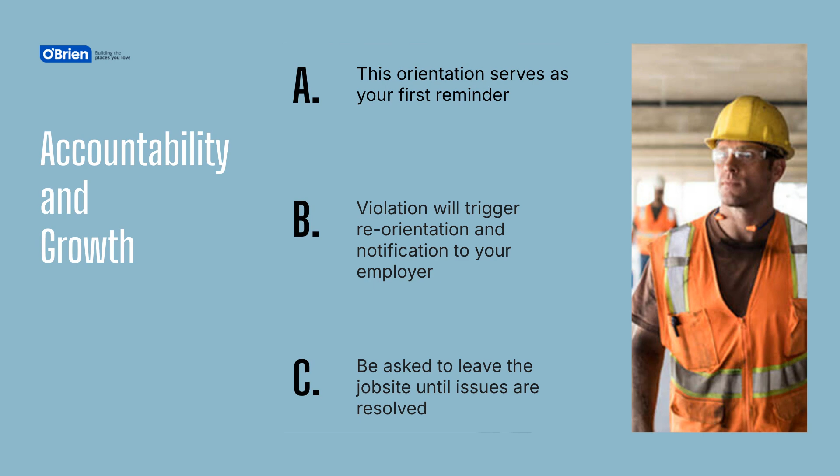Before you arrive on site, ensure you're fully prepared with all the required personal protective equipment to stay safe and compliant. This includes a hard hat, high visibility clothing such as a shirt, vest, or jacket, safety boots, protective eyewear, and gloves. Having the right gear is the first step toward a safe and productive day.

When you arrive on site, follow these essential steps before starting work. Sign in and out, making sure to include your phone number for accountability and communication. Complete the JHA, the job hazard analysis. Conduct a tailgate meeting with your crew. Ensure everyone on the team is listed on the JHA and submit it to the superintendent. Only after these steps are complete can you begin working. These procedures ensure everyone is aligned and ready to operate safely.

There's nothing more critical to ensuring your safety and the safety of your crew than starting each day with the job hazard analysis. This essential step sets the tone for a safe, productive, and organized workday.

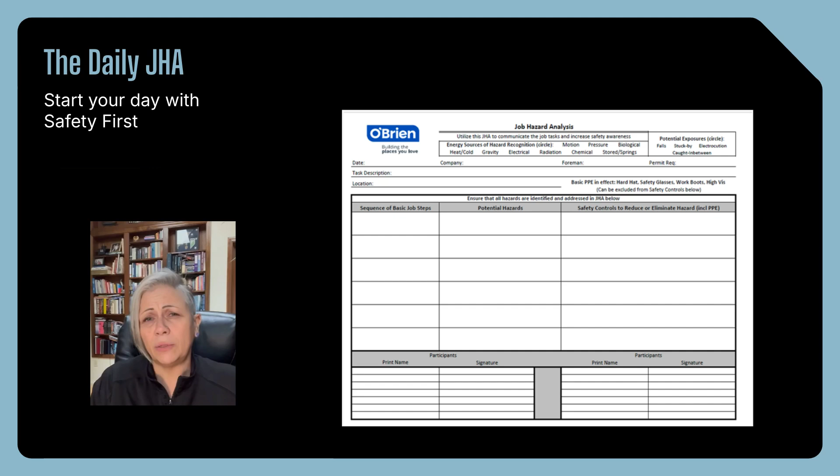Why the JHA matters: the JHA is more than a formality. It's a powerful tool with multiple purposes. Hazard identification and mitigation - pinpoint potential risks and implement solutions before work begins. Communication - create clear and open dialogue within your crew to ensure everyone is on the same page. Organization - lay out a structured plan for the day, reducing confusion and improving efficiency. Education.

Empower everyone with the knowledge they need to recognize and address hazards confidently. By completing the JHA, you're making a proactive commitment to safety and teamwork. Together, we can achieve a zero-incident worksite.

A JHA focuses on identifying hazards in job tasks before they occur. It evaluates the relationship between the worker, the task, the tools, and the environment. Once hazards are identified, steps are outlined to eliminate or control them, ensuring a safer workspace.

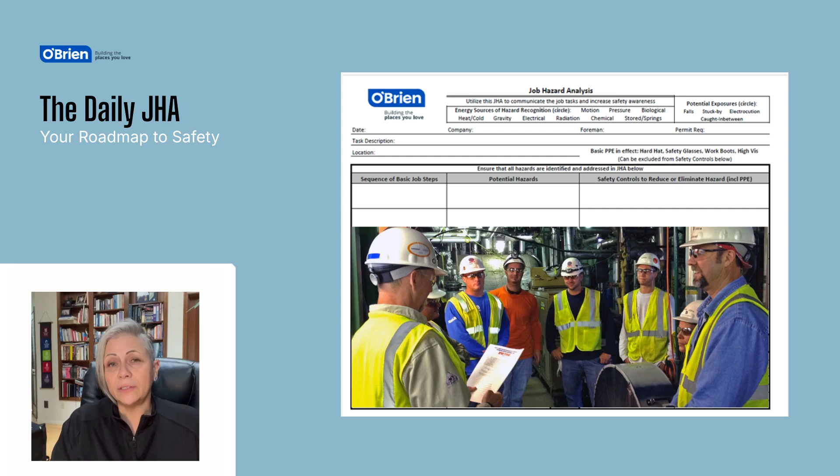Involve the whole team. Collaboration is key to a successful JHA. Each crew member brings unique insights, helping to identify hazards that might otherwise be overlooked. Involving everyone promotes a thorough analysis and fosters shared ownership of safety solutions, encouraging team commitment to a safer workplace.

When completing the JHA, conduct a preliminary job review. Discuss with your crew the hazards they know exist in their current work and surroundings. Brainstorm with them for ideas to eliminate or control those hazards.

Outline the steps or tasks for the day and fill out the sequence of job steps along the left side of the JHA. Be sure to record enough information to describe each job action without getting overly detailed.

Review these job steps with everyone to make sure you have not missed a step. The list of job steps is also a communication tool that allows the superintendent to be aware of what you're working on for the day.

Identifying the potential or existing hazards associated with each job step is the next step in the JHA process. For each job step, utilize everyone on the crew to identify all of the associated hazards and enter them in the potential hazards column. If you have identified more potential or existing hazards than can fit in the field, you can continue in the box below.

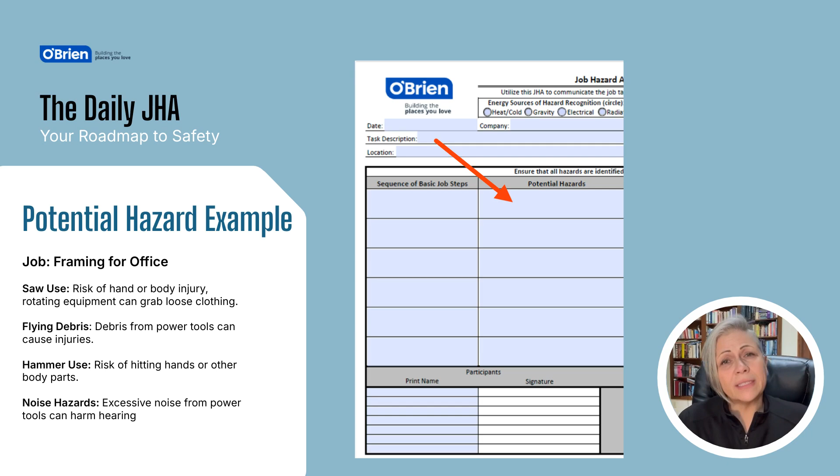The next step is to identify the practices to use to avoid or control the identified hazards and list them in the safety controls to reduce or eliminate hazard, including PPE. For example, continuing the framing job step would look like this.

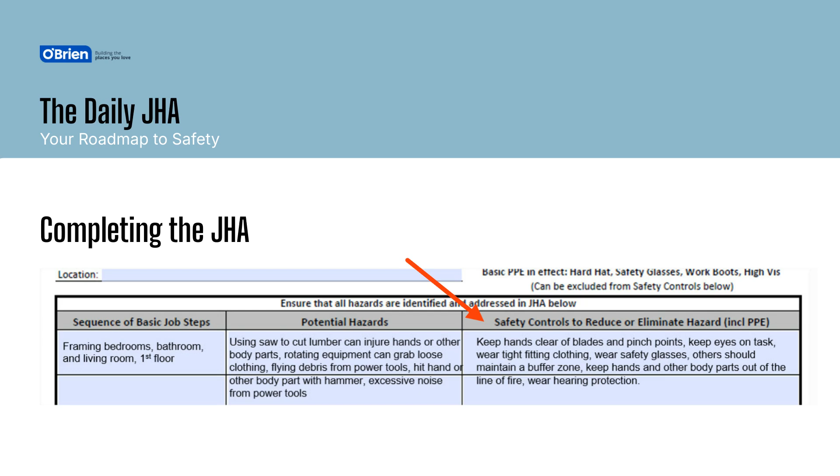When you've identified a hazard, the next step is figuring out how to control or eliminate it. One helpful approach is the hierarchy of controls, which provides steps to minimize risk. If you can't completely remove the hazard, here's how you can address it in order of effectiveness.

Substitution: swap out the hazard for a safer alternative. Engineering controls: add physical barriers like guards or interlocks to separate you from the hazard. Administrative controls: adjust how the work is done to reduce exposure to the hazard.

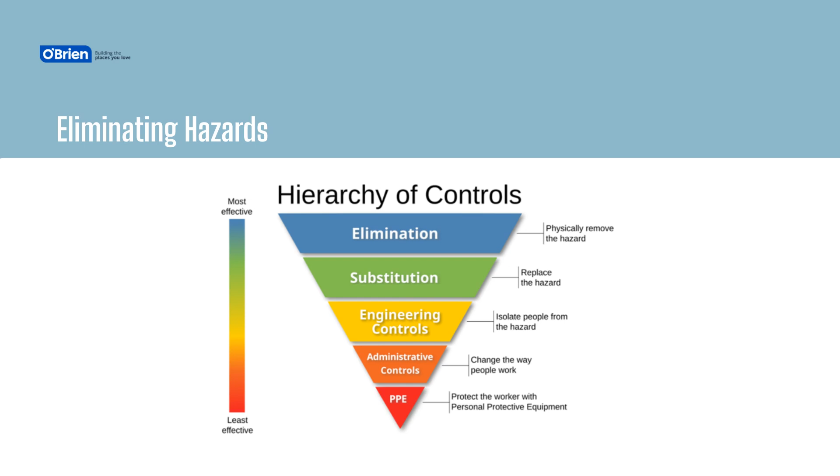PPE, or personal protective equipment: use gear like gloves, goggles, or hard hats as your final layer of protection. The goal is always to use the most effective solution possible, starting at the top of the hierarchy.

Continue the list of job tasks for the day along the left column, then identify the potential and existing hazards for each task in the center column. Then the controls for eliminating or controlling the associated hazards in the right column. Then have everyone on the crew read and sign the JHA.

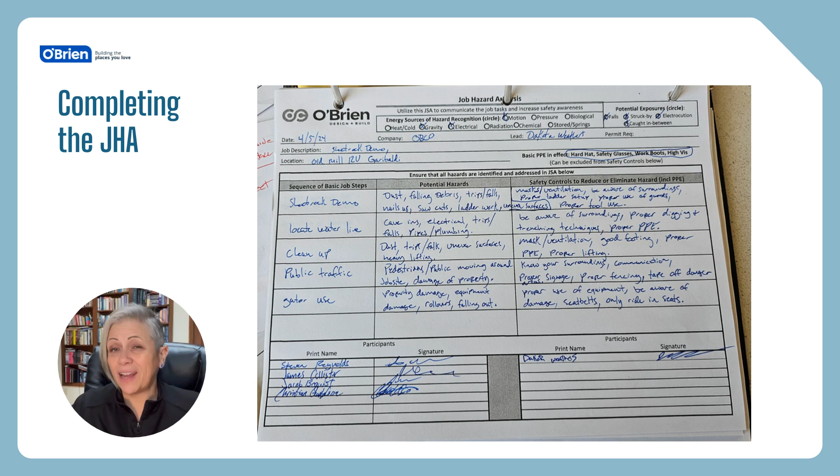Please note that basic PPE is already in effect and should be worn while working on site, such as hard hats, high visibility clothing, safety boots, and safety glasses.

Let's talk about personal protective equipment, or PPE, and the responsibilities we all share to ensure it's used properly. First, it's the employer's responsibility to provide all required PPE to their employees. That means you should always have access to the gear you need to stay safe.

Now, let's cover the minimum PPE requirements while working on site. At all times, you must wear a hard hat, safety glasses, protective footwear, and high visibility clothing. One quick note on footwear: tennis shoes are not allowed on O'Brien projects except for roofing tasks.

If you need to wear soft-soled shoes for roofing, make sure to note it on your JHA before beginning work. In addition to the basics, you may need extra PPE like hearing protection, a face shield, or gloves, depending on the task. Make sure you're aware of what's required for your specific job.

If you arrive on site without the proper PPE, you will either be sent off-site until you have the required equipment, or, if available, O'Brien will provide PPE and the sub will be charged for it.

It's not enough to just have the equipment. It needs to be in good shape. All PPE must be clean, safe, and reliable. Inspect your equipment before wearing it to ensure it's in good condition.

One more important note: if you're wearing a hard hat, remember to connect the chin strap when you leave the ground. That includes tasks like working on ladders, lifts, or roofs. By following these guidelines, we're ensuring a safer work environment for everyone. If you have any questions about your PPE or what's required for a task, don't hesitate to ask your supervisor.

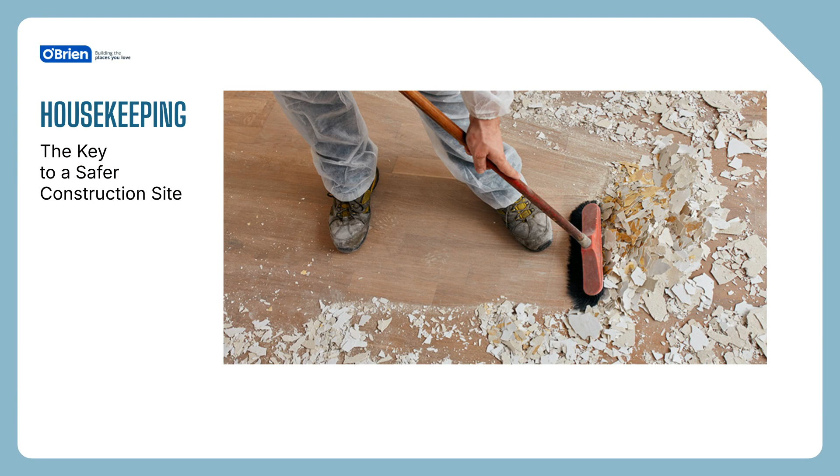Keeping your work area clean is a simple but essential part of maintaining a safe and efficient job site. By cleaning as you go, rather than waiting until the end of the day or even the week, you help create a safer environment for everyone.

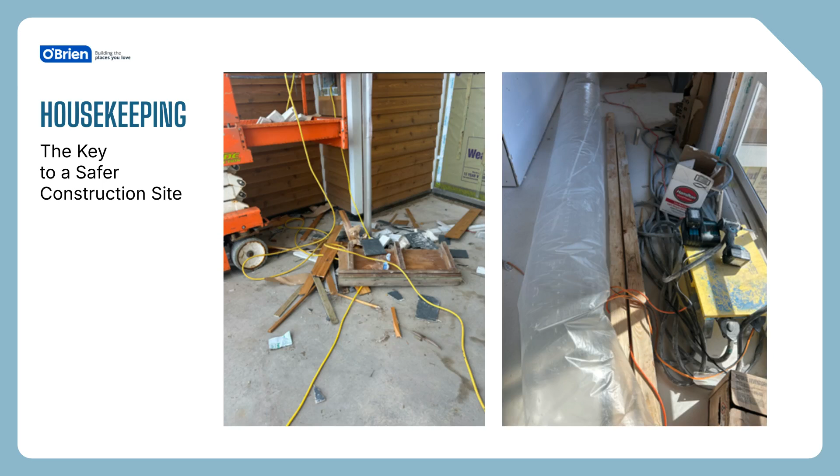Take a look at the images here. They highlight examples of poor housekeeping, which can result in hazards like slips, trips, and falls. Beyond safety risks, poor housekeeping can also lower team morale, reduce efficiency, and even lead to fire hazards or damage to equipment and materials.

If you leave an area in an unsafe or unclean condition, O'Brien will take steps to clean it, and the cost of that cleanup will be charged to your company. In addition, your company's owner will be notified.

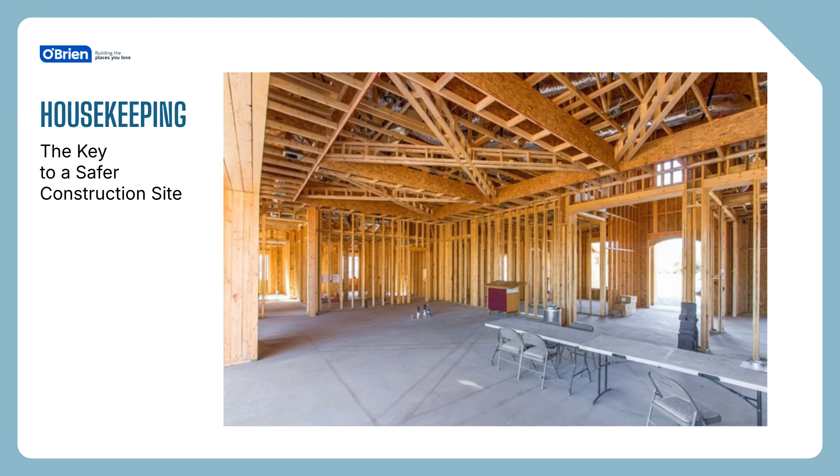We can avoid all of this by staying proactive. Good housekeeping is everyone's responsibility, and it helps us work smarter, stay safe, and maintain a job site we can all be proud of. Remember, a clean site is a safe site.

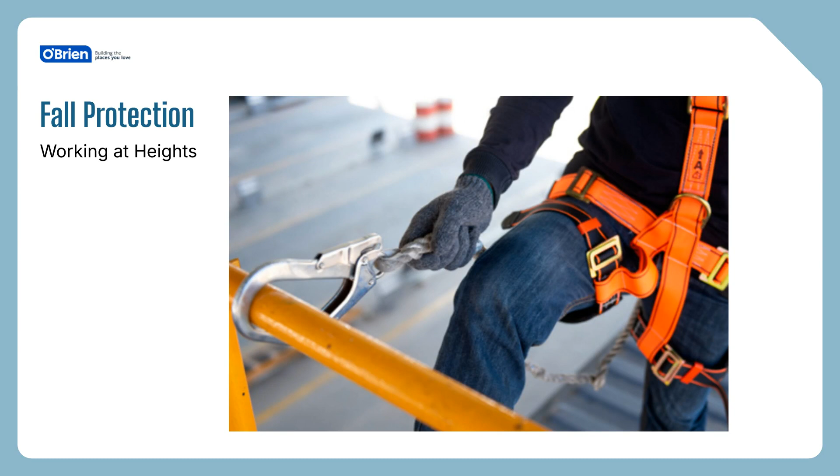When working at heights, 100% fall protection with a rescue plan is required at all times. Here's what you need to know.

In Oregon, fall protection is required for heights of 6 feet or greater. In Washington, the requirement starts at 4 feet or greater. Each employer must provide a competent person on site at all times to oversee fall protection measures.

If any fall protection equipment is deemed unsafe, it will be removed or destroyed at the discretion of the superintendent or director of safety. Every employee wearing personal fall protection must be properly trained.

This includes understanding the purpose of fall protection equipment, inspecting it before use, knowing how to wear it correctly, and storing it properly. You may be asked to provide proof of your fall protection training at any time. Failure to do so will result in removal from the site until proof is provided.

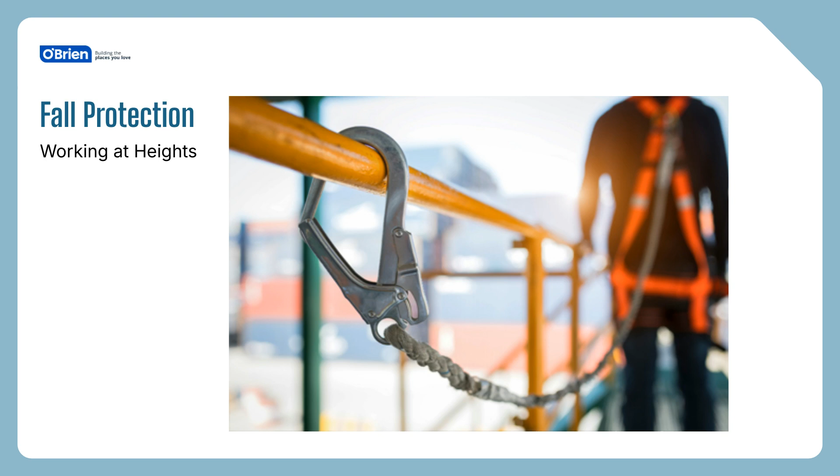Violating the fall protection policy is taken very seriously. A first-time violation can result in immediate and possibly permanent dismissal from O'Brien projects.

Why such strict enforcement? Falls from heights are the number one cause of fatalities in the construction industry. Protecting you and your coworkers is our top priority, and this policy is designed to ensure everyone goes home safe at the end of the day.

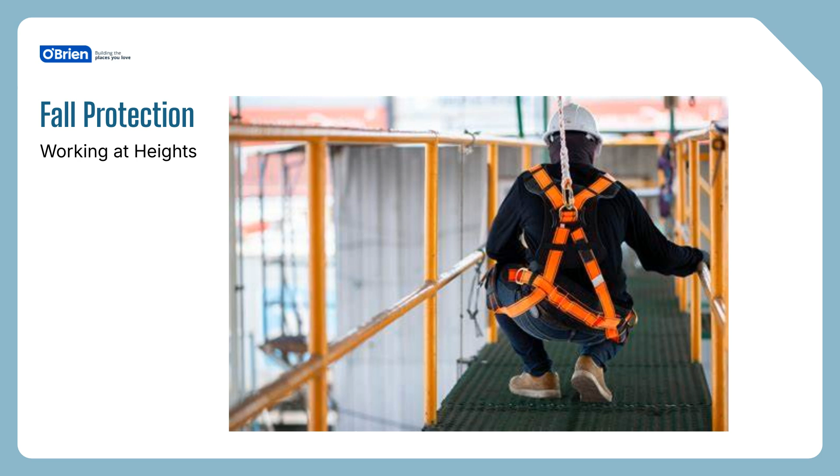Whenever possible when working at heights, we prefer passive fall protection, such as guardrails. Guardrails must be 42 inches high, plus or minus 3 inches. They must include a mid-rail and toe board for full protection.

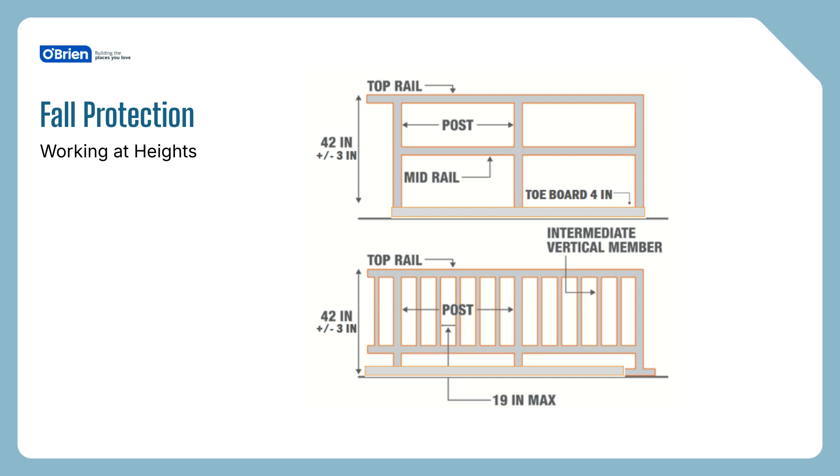Fall protection is mandatory in the form of guardrails or a personal fall arrest system with the use of an anchor, body harness, and a lanyard. Controlled access zones with warning lines are not allowed on O'Brien projects. These measures are essential for ensuring everyone's safety while working at heights.

Let's talk about ladder safety, one of the most important aspects of working safely on a construction site. Following these simple guidelines can prevent accidents and keep everyone safe.

Always face the ladder. Whenever you're climbing or descending, always face the ladder and maintain 3 points of contact. This means 2 hands and 1 foot, or 2 feet and 1 hand, should always be in contact with the ladder. Use the belt buckle rule.

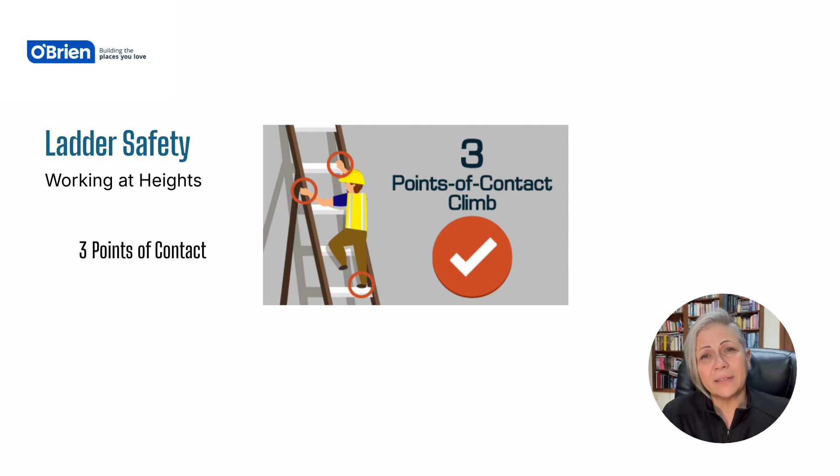Remember the belt buckle rule, do not overreach. Keep your belt buckle within the sides of the ladder to maintain balance and avoid tipping it over.

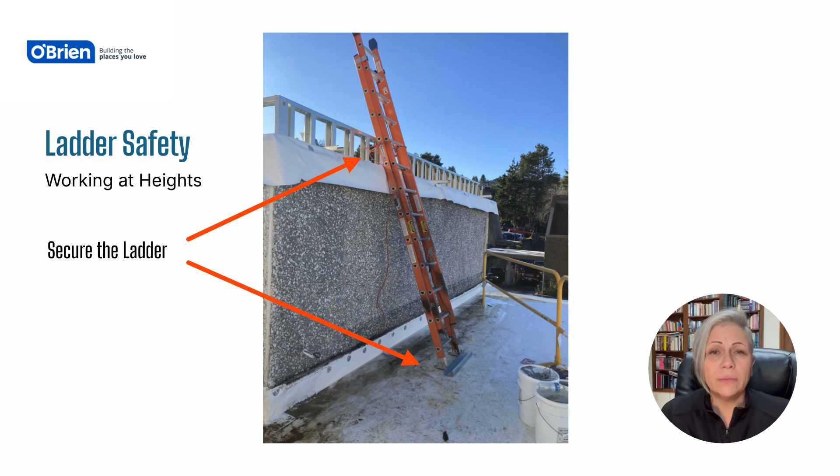Secure the ladder. Ladders must be secured at both the top and the bottom to prevent movement while in use. When using an extension ladder, ensure that it extends at least 3 feet above the landing it provides access to. This gives you a secure area to step off and on safely.

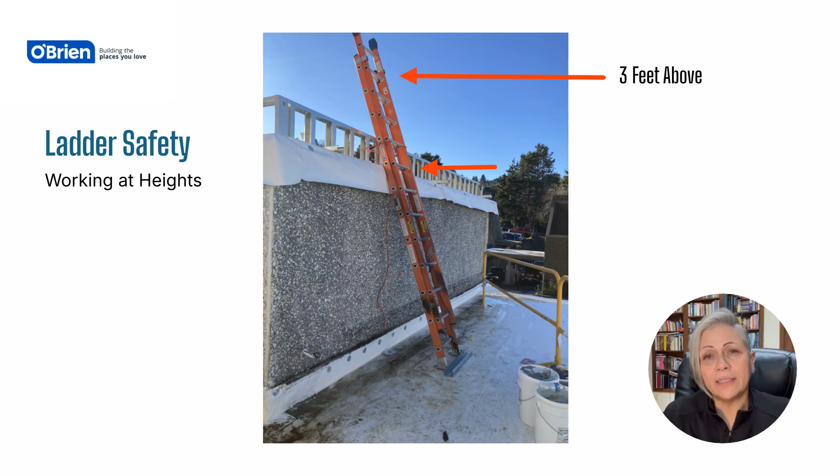Make sure to have the correct ladder angle, the 4-to-1 method. To set the ladder at the correct angle, use the 4-to-1 method. For every 4 feet of height, place the base of the ladder 1 foot away from the wall or structure.

To test the angle, place your toes at the bottom of the ladder. With your hands outstretched, you should be able to reach a rung comfortably without bending your arms or leaning forward.

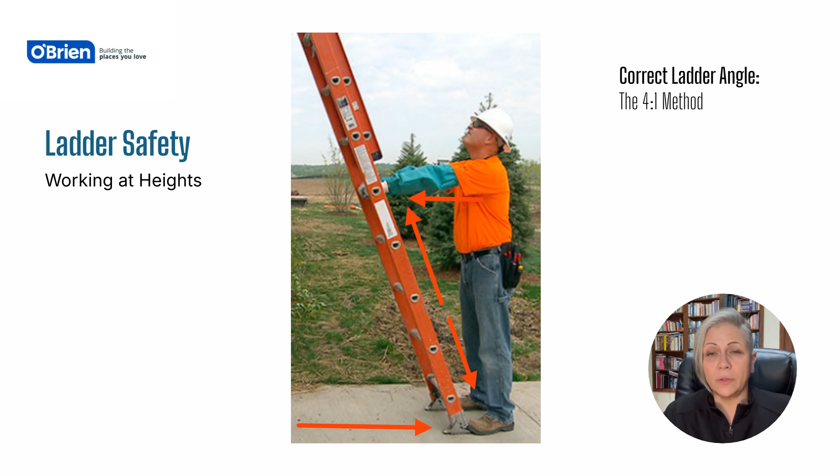Inspect the ladder before use. Before using a ladder, inspect it for cracks, damaged rungs or rails, missing screws or rivets. If you find any damage, do not use the ladder. Check labels to ensure that all labels are present and legible.

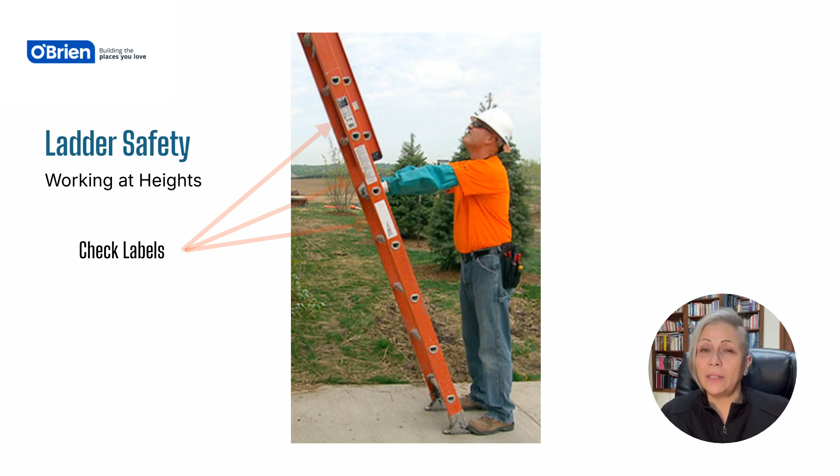These labels often include important safety information and warnings. Now, let's discuss the proper use and safety guidelines for stepladders. Adhering to these rules is essential for preventing injuries and ensuring a safe work environment.

A stepladder must never be used to access another level or surface. Always remember, a stepladder is considered a working platform, not a tool for climbing between heights. The top step and cap of a stepladder should never be used as a step. Using these areas compromises your balance and safety.

Ensure the spreader bars are fully extended and locked into place before using the stepladder. This provides stability and prevents the ladder from collapsing.

Before using the stepladder, inspect it carefully for any signs of damage. Look for cracks, damaged rungs, or rails. Check for missing screws or rivets. Do not use a ladder that is damaged in any way.

All 4 feet of the stepladder must be firmly on the ground. Avoid placing the ladder on uneven or slippery surfaces.

Always face the ladder while climbing and maintain 3 points of contact. This means having 2 hands and 1 foot, or 2 feet and 1 hand, on the ladder at all times.

Follow the belt buckle rule. Keep your belt buckle centered between the ladder rails. Do not overreach or lean too far to either side.

Ensure all labels on the ladder are present and legible. They provide important safety information and instructions.

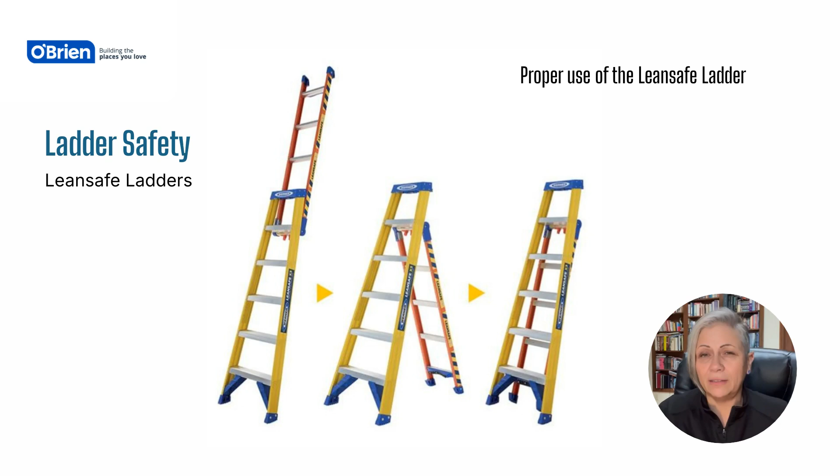To ensure your safety, follow these best practices when using a Leansafe ladder. Stay off the top step and cap; they are not designed for standing. Keep all 4 feet on the ground when using it as a stepladder. Inspect before use. Look for any damage or wear before climbing.

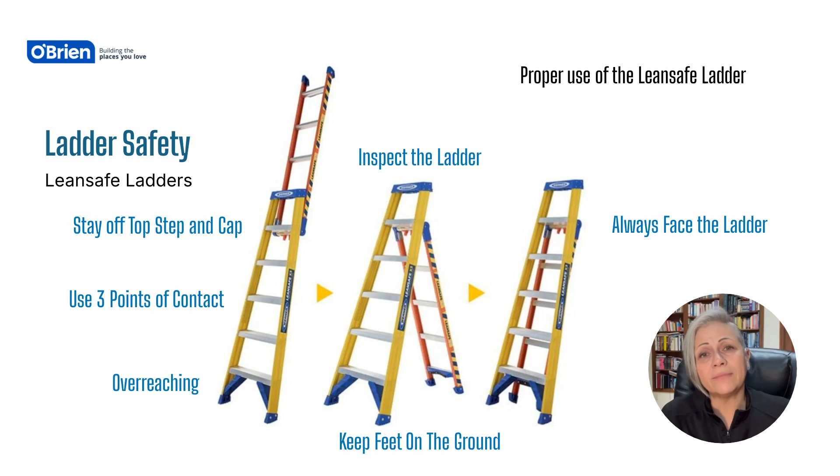Always face the ladder while working to maintain stability. Use 3 points of contact at all times for balance and security. Follow the belt buckle rule. Never overreach beyond the ladder's side rails. By following these simple but essential steps, we can keep our work sites safer and prevent falls.

Power tools are essential for getting the job done, but using them safely is just as important as using them efficiently. By following a few key safety rules, we can protect ourselves, our coworkers, and our job site from preventable accidents. All power tools must have proper working guards.

They are there to protect you. Saw guards must remain in place and should never be pinned back. The ground plug must never be cut off and should only be repaired using original manufacturer's replacement parts.

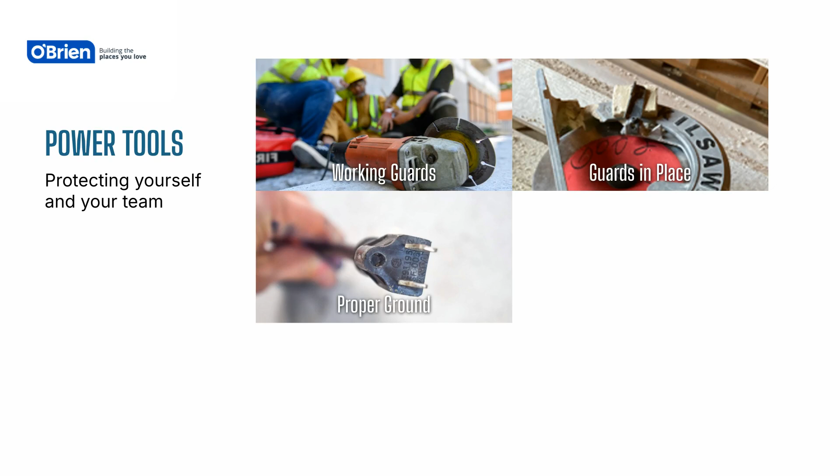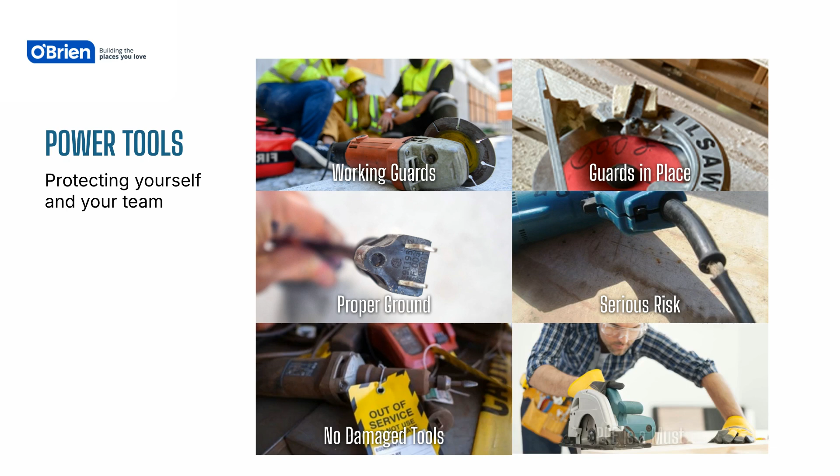If a power cord is damaged, it can create serious risks. The entire pigtail must be replaced by a certified electrician. If a tool is damaged, defective, or unsafe, it must be removed from the site immediately, no exceptions. When operating power tools, gloves and safety glasses must be worn at all times.

By taking these simple precautions, we can keep our tools in top shape and our work site safe.

Electricity is a powerful tool on our job sites, but improper use of cords can create serious hazards. By following a few simple guidelines, we can ensure a safe and efficient work environment for everyone.

Best practice is to always inspect and maintain your cords and read the labels. Extension cords cannot be connected together or daisy-chained. Always use a cord of the correct length to avoid overload and fire hazards.

Damaged or modified cords are a risk to everyone; they must not be used on the site. All power for construction must be protected by a GFCI branch circuit. This prevents electrical shocks and ensures compliance with safety standards.

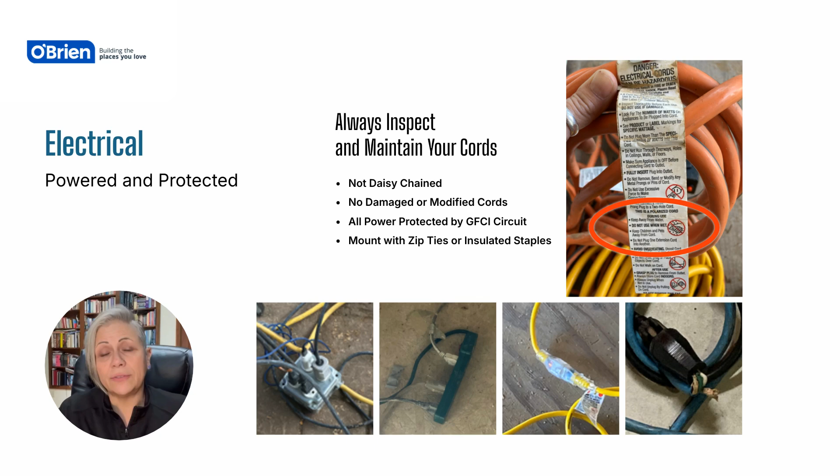Cords should never be mounted with nails or staples, as they can pierce the insulation and create a fire or shock hazard. Instead, use zip ties, insulated staples, or other non-metallic fasteners.

If an extension cord is deemed unsafe, it will either be removed from the site or destroyed at the discretion of the superintendent or director of safety. By following these best practices, we can prevent accidents, protect our equipment, and keep our job site running smoothly.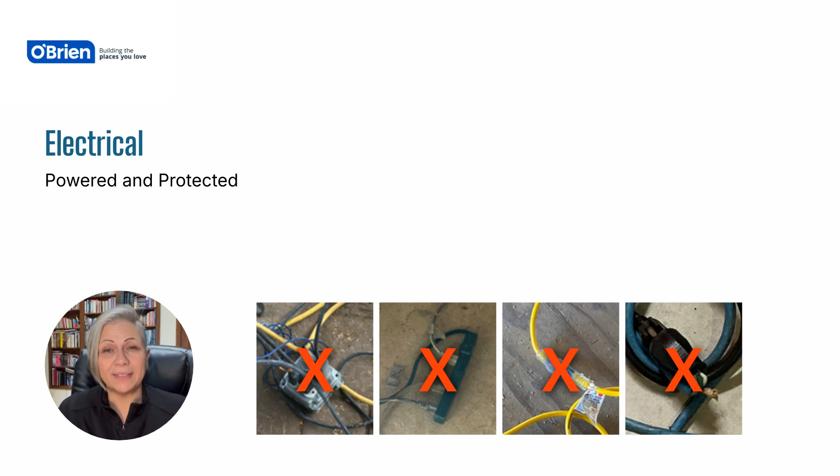Scaffolding is an essential tool for working at heights, but it must be properly inspected, maintained, and used correctly to keep everyone safe. Let's review some key scaffolding safety guidelines to ensure a safe and productive job site.

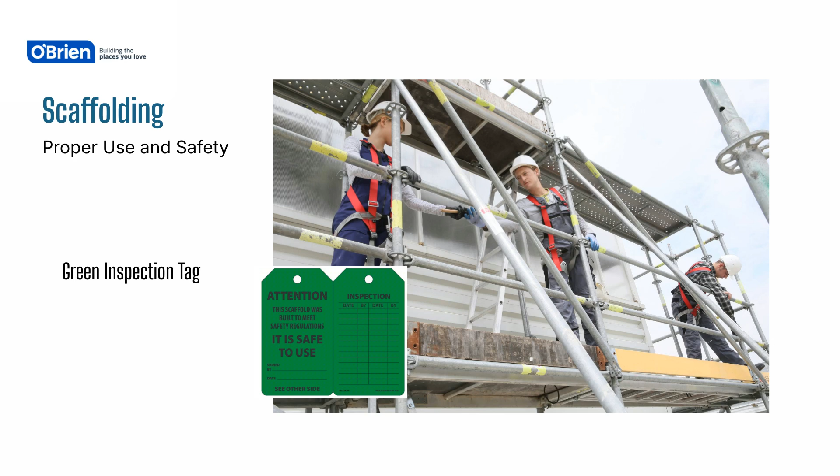A competent person from the subcontractor must inspect and certify all erected or mobile scaffolding at the start of each shift. A green inspection tag must be attached to the scaffolding. It should be placed within eyesight of the ladder leading to the next level and must be filled out daily. Training is required. Every worker using scaffolding must be trained in scaffolding safety.

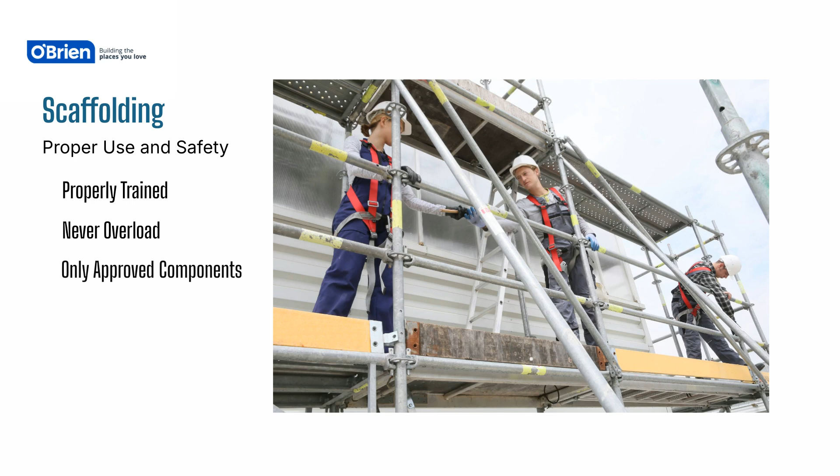Never overload scaffolding planking. Exceeding weight limits can compromise structural integrity and cause collapse. Use only approved scaffolding components. Makeshift or non-standard parts can lead to instability. Follow the manufacturer's instructions. Proper setup and use ensure scaffolding remains safe.

Inspect before use. Check to see if any scaffolding components are damaged. Proper planking must be in good condition and pushed together to eliminate any gaps. Any concerns or modifications should be immediately reported to the O'Brien superintendent for review.

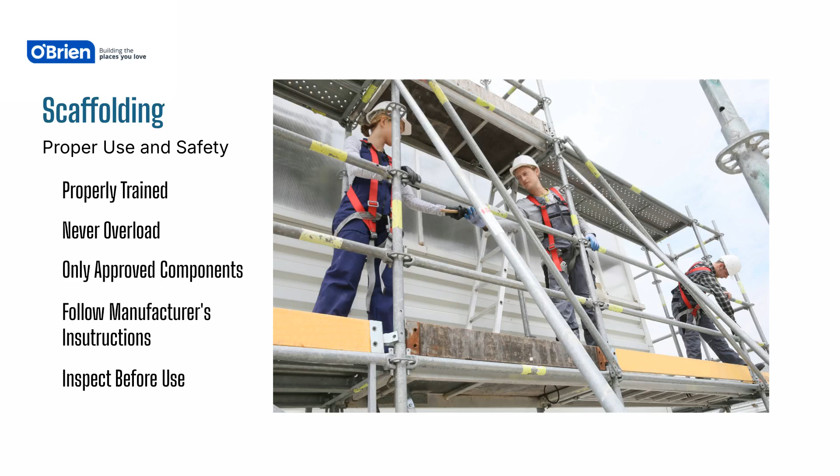Never use unstable objects like bricks or boxes to support scaffolding. And never walk under scaffolding. Base plates must be centered on a mudsill and secured on two opposing sides for a firm foundation.

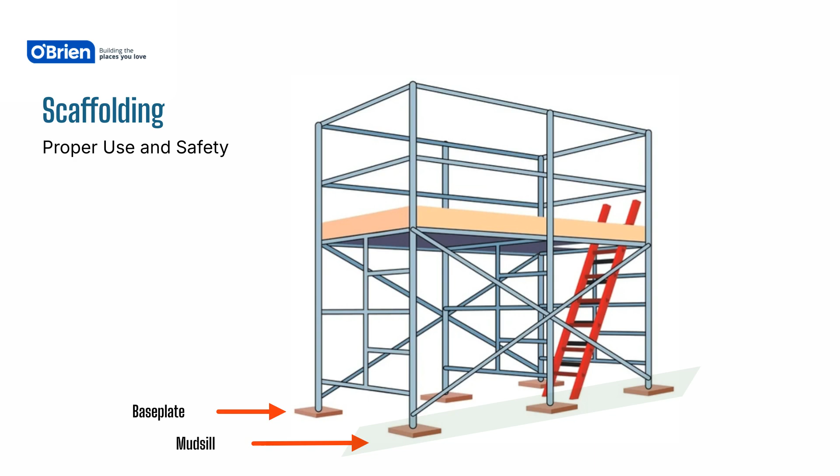Use guardrails, handrails, toe boards, or debris nets to protect against falling objects. If a guardrail is not present, you must wear a personal fall arrest system. Use catch platforms or canopy structures to deflect falling objects and keep workers below safe. Install netting to catch anything that falls, preventing hazards to workers and bystanders.

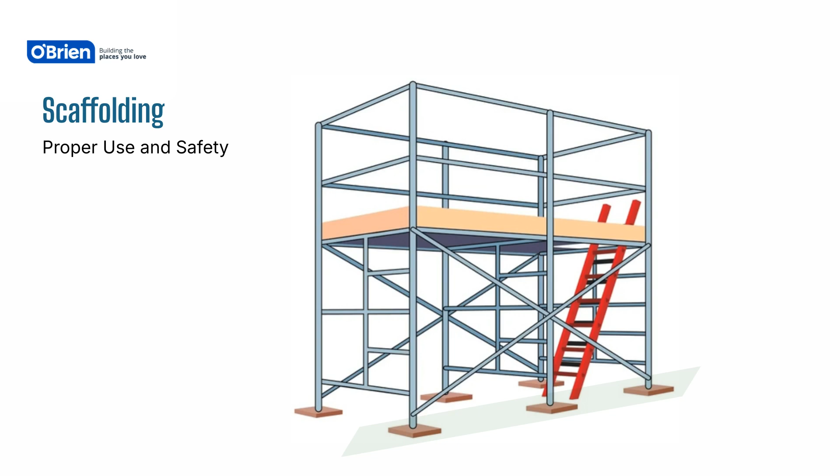By following these scaffolding safety guidelines, we reduce risks, prevent falls, and ensure a secure work environment for everyone.

Now let's review the essential basic safety rules that apply to every job site. These guidelines are in place to protect you, your coworkers, and the integrity of our projects.

Weapons and violence. Safety starts with respect. Weapons and any form of violence are strictly prohibited on our job sites. If you see any threatening behavior, report it immediately. We foster a culture of teamwork and professionalism, and there is no room for hostility.

Music and earbuds. We all enjoy music, but on a job site, communication is key. Earbuds are not allowed. Music should never interfere with communication, and superintendents reserve the right to ban music completely if it becomes a distraction. If you need to hear instructions, warnings, or signals, you must be fully aware of your surroundings at all times.

Dress code. Your safety starts with what you wear. The following attire is not allowed: sweatpants, tank tops, shorts, torn or tattered clothing. Wearing proper work attire helps protect you from hazards, debris, and potential injuries. Ensure you dress appropriately for the job and wear all required PPE, personal protective equipment.

Fuel storage. If you work with fuel cans, they must be made of metal, properly labeled, equipped with a spark flame arrestor. Improper storage or handling of fuel can create dangerous conditions, including fires or explosions. Always follow the correct procedures.

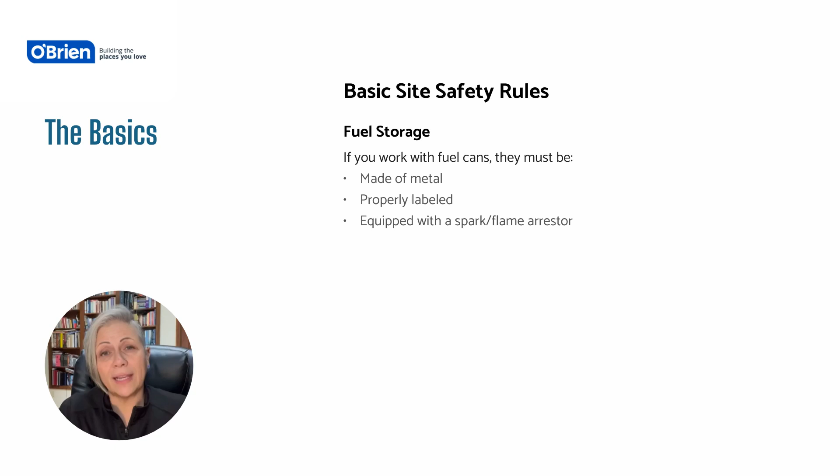Storing hazardous materials. Any hazardous material must be stored properly and accompanied by a safety data sheet, SDS. The SDS provides critical information on handling exposure risks and emergency procedures. If you're ever unsure about a material, ask a supervisor or consult the SDS before use.

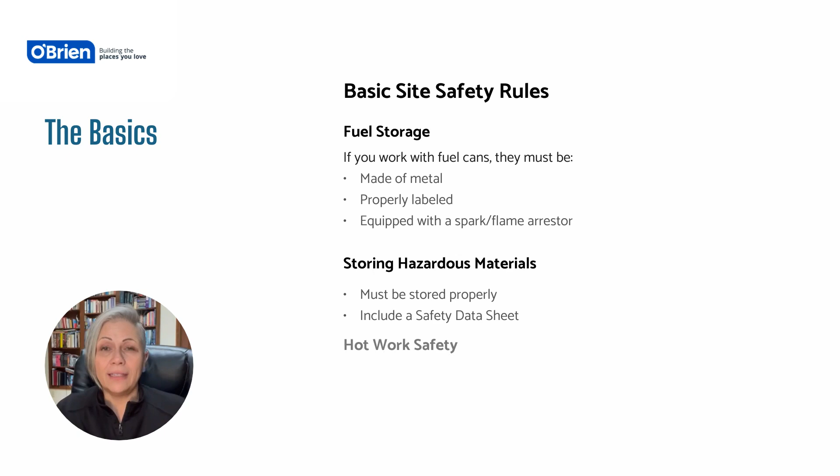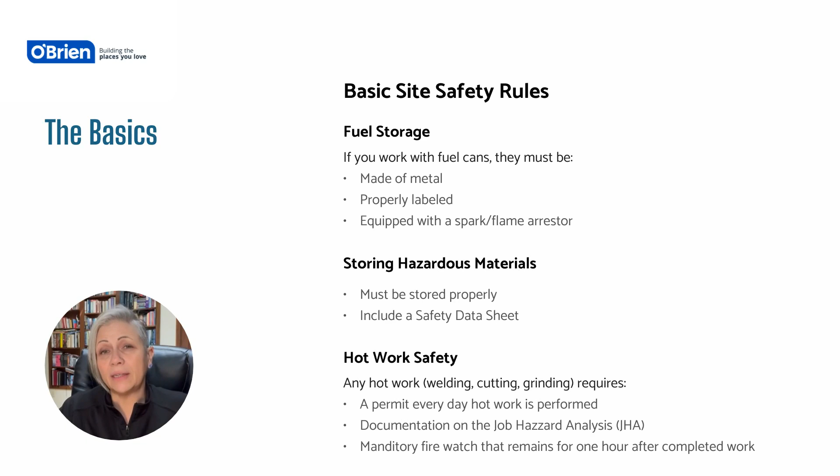Hot work safety. Any hot work, such as welding, cutting, or grinding, requires a permit every day hot work is performed, and documentation on the job hazard analysis. A mandatory fire watch must remain for at least 1 hour after work is completed. Fire hazards can arise long after the work is done, which is why the fire watch is so important. Never leave an area unattended if hot work has just been performed.

Fire safety and fire extinguishers. Fire safety is everyone's responsibility. Fire extinguishers must be within 50 feet of all flammable materials. The maximum travel distance to a fire extinguisher must not exceed 75 feet. Fire extinguishers must always be readily available, visible, and unobstructed. Know where the nearest fire extinguisher is at all times. If you ever need one, every second counts.

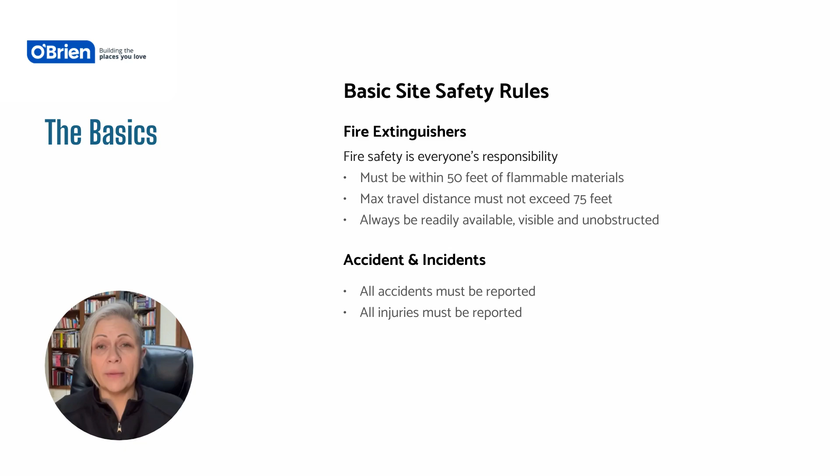Accidents and incident reporting. No matter how small an injury may seem, report all accidents and injuries to the project superintendent immediately. Delaying reports can put others at risk and prevent proper documentation. Quick action can prevent minor issues from becoming major problems.